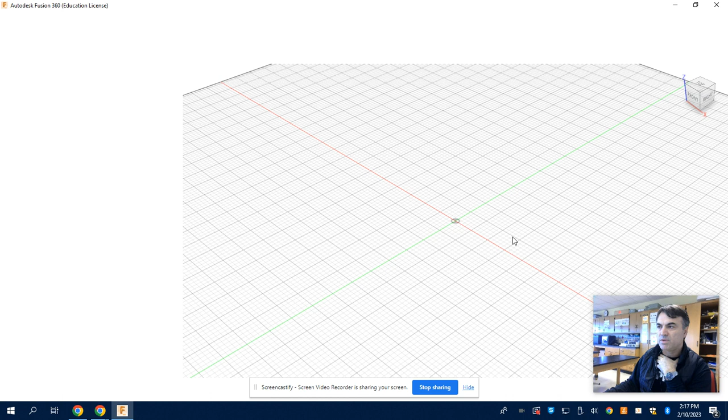So let's go. Again, the purpose of these videos is to get them done in as short a time as possible, so that you can follow up and complete any missing assignment that you might have. All right. So there are a couple of techniques and features that need to be used with Fusion here, but the process is rewarding, I shall say.

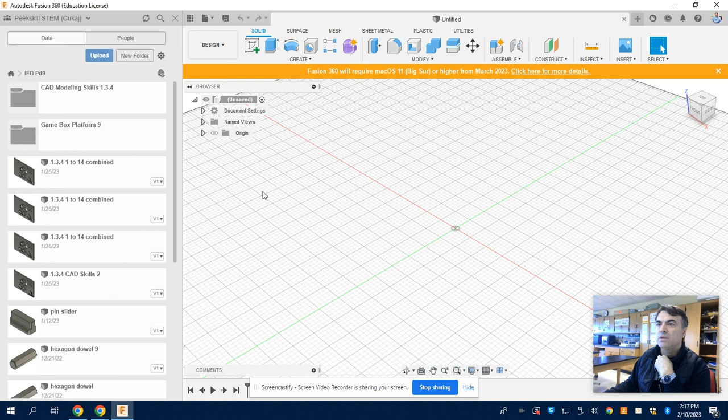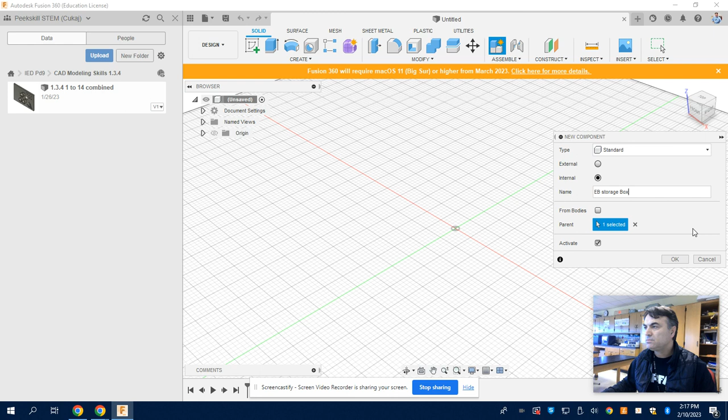Okay, so I'm here. Let me go to period 9, IED period 9 here, CAD modeling skills. Let me right click, new component. I'm going to name this new component earbud storage box. So today I'm going to do only the bottom part of it, the box itself. Alright, so let me get started.

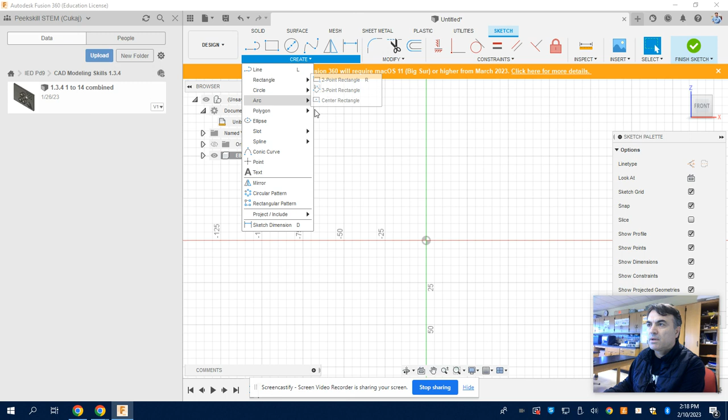Create sketch on the front side. I'm going to create a rectangle, center rectangle. So let me make sure that the units are in millimeters. I'm glad I caught that. Alright, so create rectangle, center rectangle, and put it in the center, and the dimensions for the rectangle are 55 by 32. So 55 tab 32. Alright, so I got that. I say finish sketch. Good.

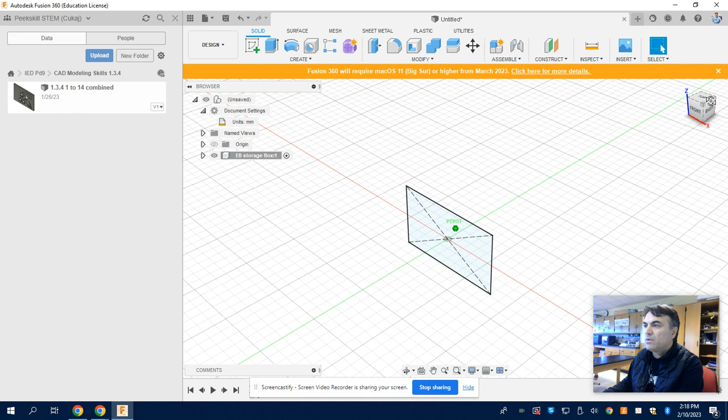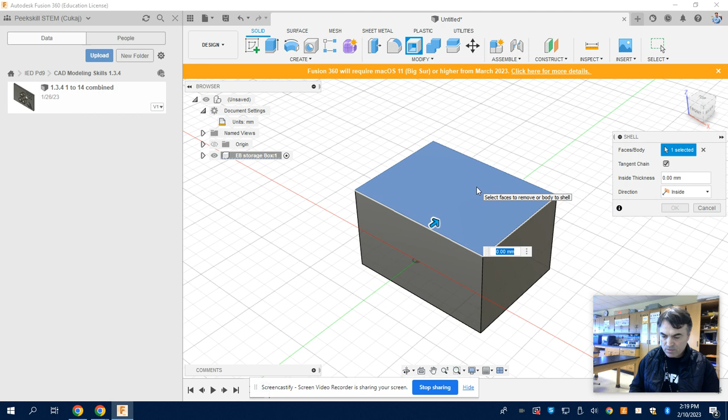So let me bring it a little bit more in view. Now I'm going to go ahead and extrude this. Press extrude, going this way, I'm going to make it 41, that is the dimension for this box. Enter. So now I'm going to shell the top of this box. I go to the shell feature here, click on top. I'm going to leave it 2 millimeters around each side. Press enter. But the back part of it ought to be 3 millimeters.

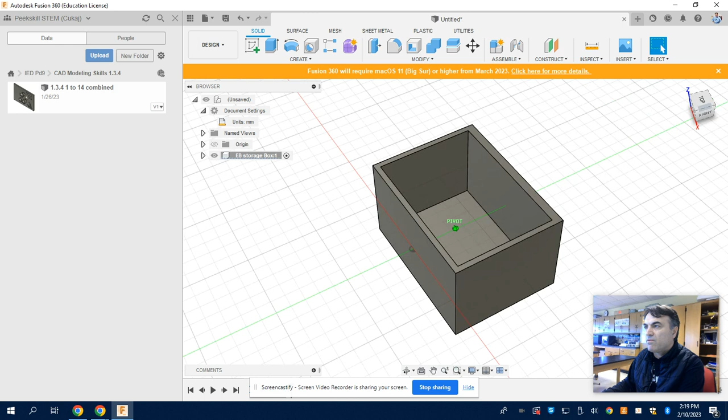So I'm going to click on the back, click extrude, and add 1 millimeter to this back. Okay, so I say enter and everything is fine. If I take a look, you see how this is a little bit thicker than the rest of them. So my next thing here is to add a fillet. I'm going to add the fillet in the front.

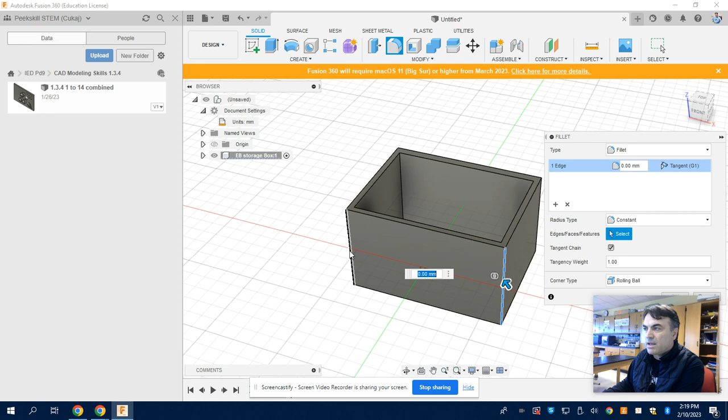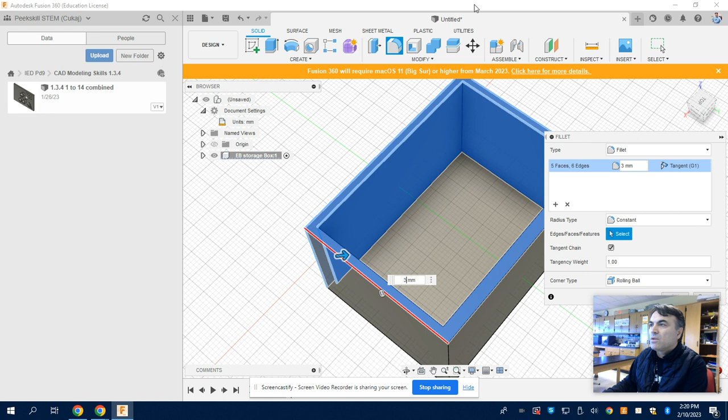So fillet, I'm going to select this, go inside, select this section inside, and select this corner. Nope. All right, so turn this and select this corner as well. So I selected all the front corners, and I'm going to make this fillet 3 millimeters. Press 3 and press enter. Let me see what I got. Did something happen here? Let me move this out of the way. Cancel. Let me go back again.

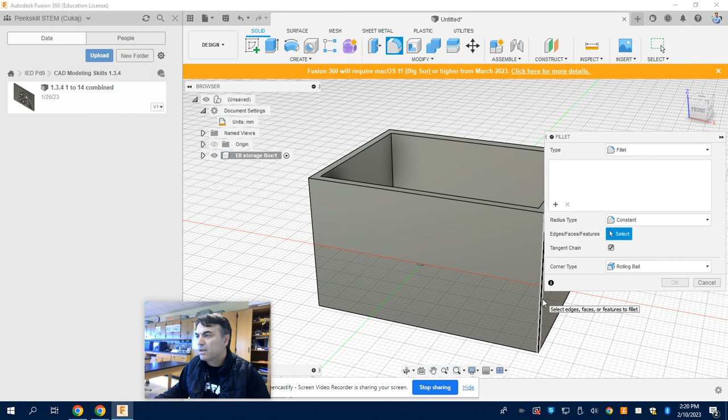So fillet. Again, select this, rotate it, catch this, rotate it a little bit, catch this, and set it to 3. And say okay. So that's done. You see how it took that shape? So this is the front, and so far so good. Alright.

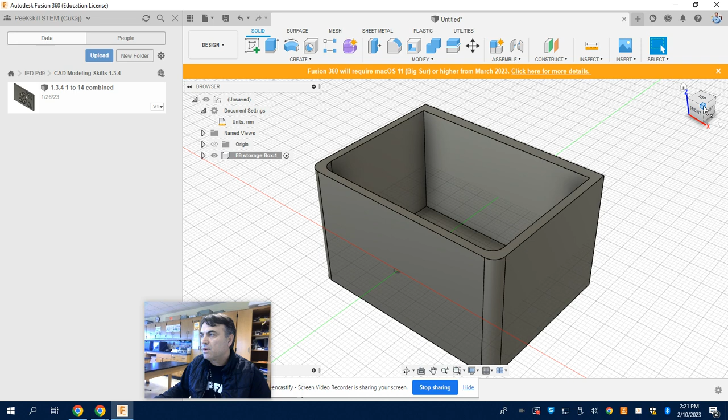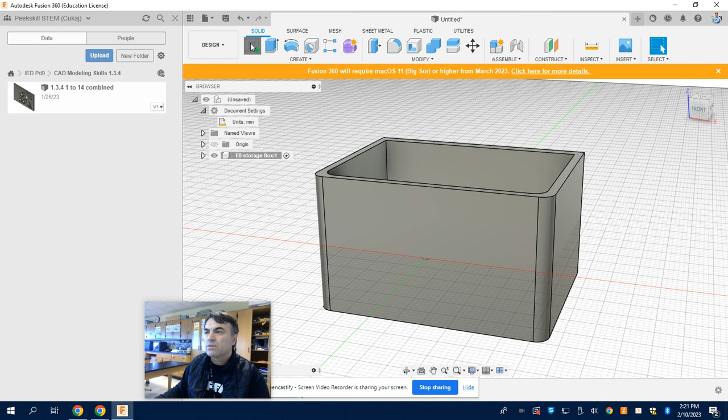Now we are going to add a front rectangle on this side, on the front. So it's this part of the box, you can see it, that section. This is the box that I already built for the other class. So I'm going to create a sketch over here. Create a rectangle, place it over here, and the dimensions for this rectangle ought to be 15 by 3. 15 tab 3.

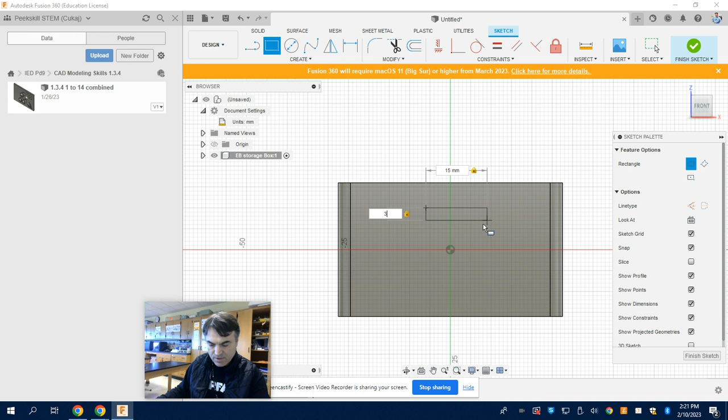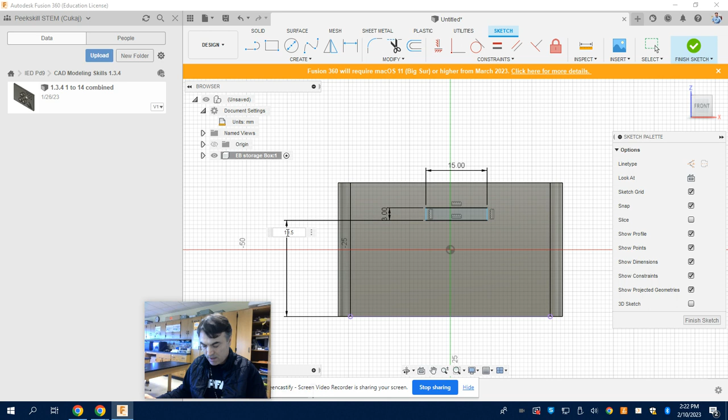And now I have to do some measurements here. Enter. The measurement from the bottom, this line here to this line here, ought to be 19.5. Okay, and that's looking good. Now I have to get this thing over here to this thing over here. Can I dimension? This would not allow me. See how it doesn't turn blue because it's not visible.

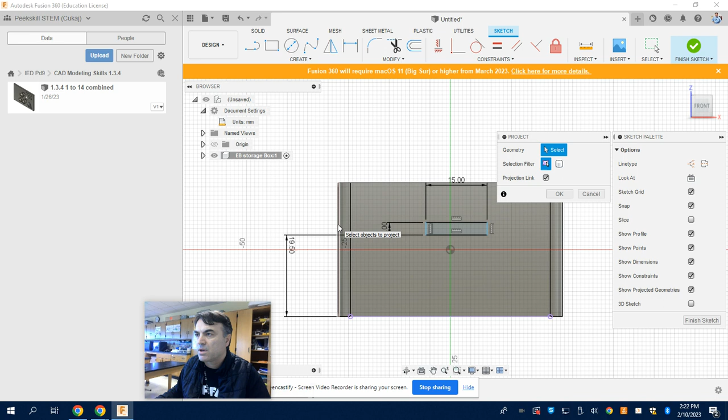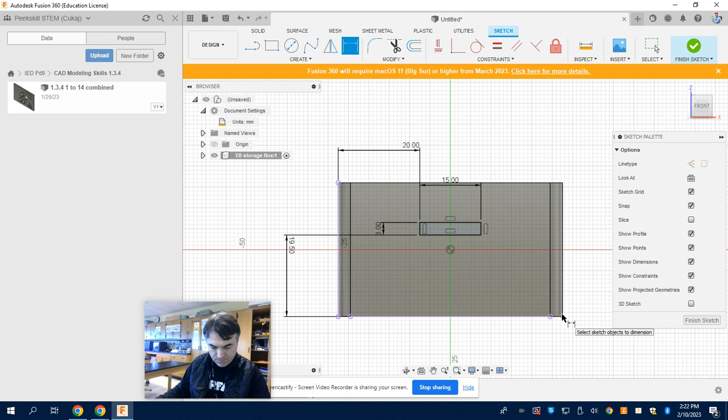So what I have to do is create a projection here. I project this one, and now I do the dimension. So this one to this one ought to be 20 millimeters. Yes. Okay, so we got that. Now I finish this and go ahead and extrude it. I extrude it 1.5, and I press enter.

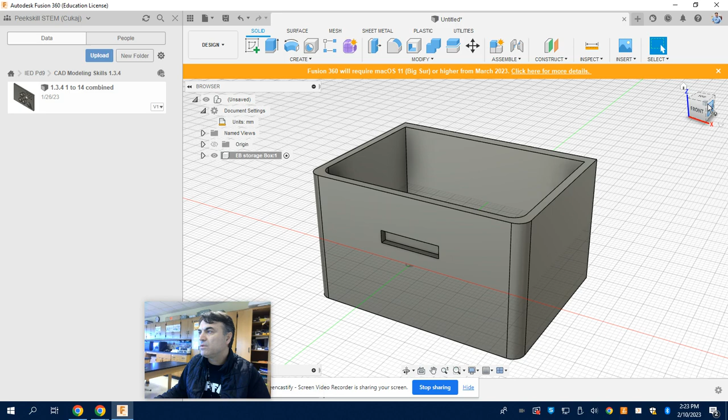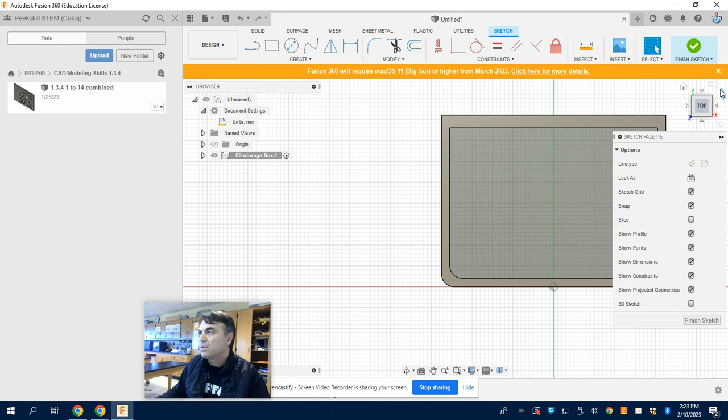You see how I created this? That's the place where the latch will click in to lock the box. Very good. So next, what do I need to do here? Okay, so I have to add some little things. Click here, click create sketch. I have to bring this over here. Okay, it's going as expected.

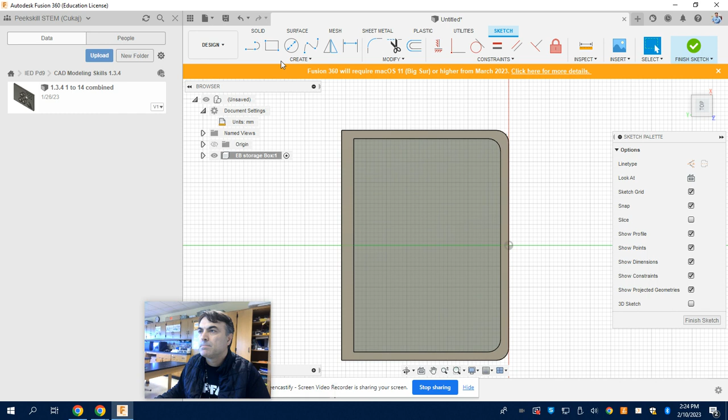Alright, so I have to create a circle that is 2.5 millimeters. So create a circle that is 2.5 millimeters. 2.5. Do I say enter? Yes. Good. Now I have to dimension this: the right edge 15 millimeters and the bottom 17.5.

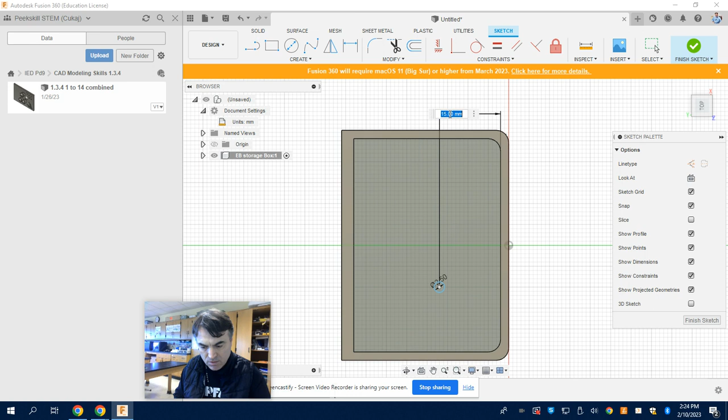So from here, do I need to do that? Yeah, from here to here. So that is how much? That ought to be 15.

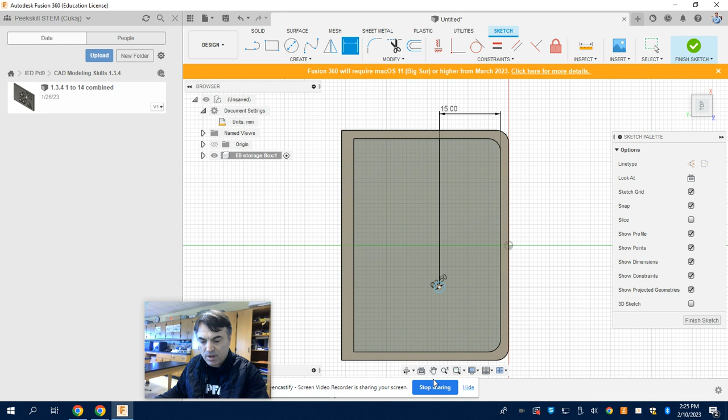Okay, enter. And then what else do I have? From the bottom to the circle, from here to here, I have it 17.5.

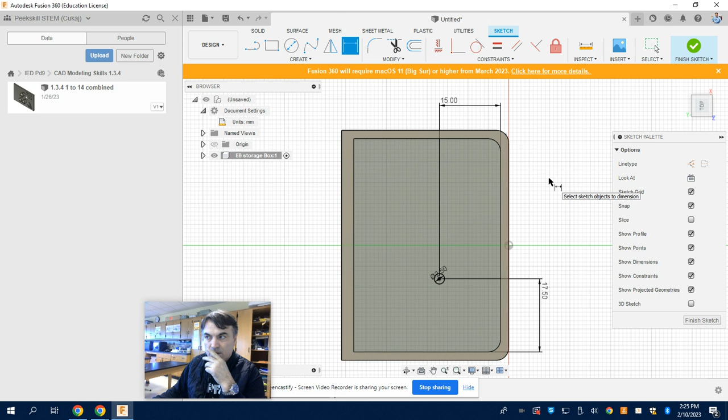Enter. Alright, so we got that. Now I have to use this to create a rectangle pattern. Create rectangular pattern.

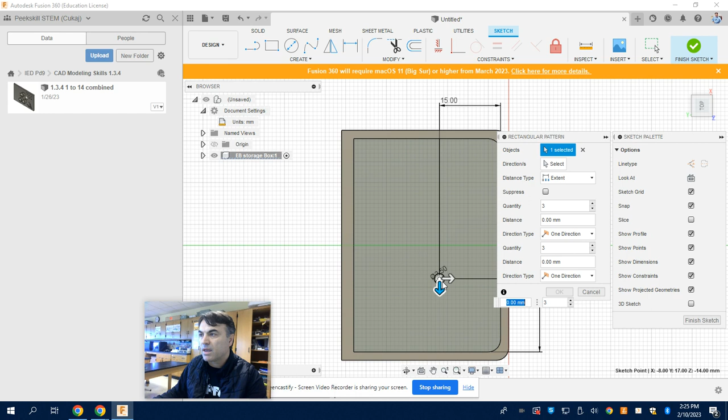I select this, you see how I have some arrows there? So this one to go up is negative 20 and 5, minus 20, and this ought to be 5, tab 5, and then the other one is one ought to be minus 10, 10, and 3. Alright, so I got that.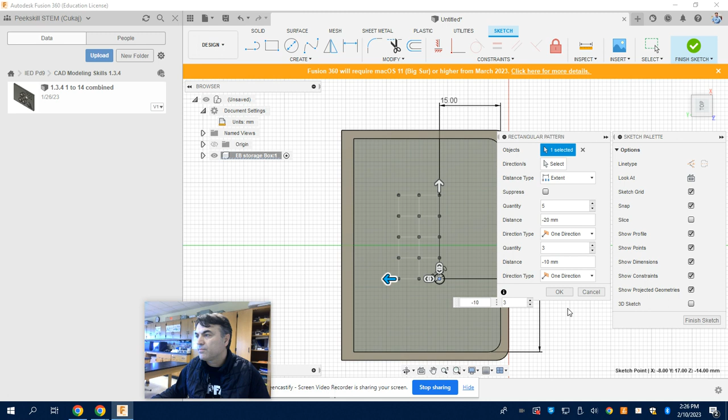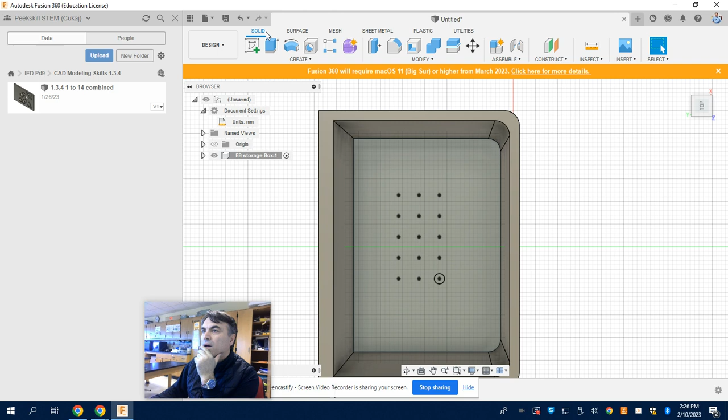I say OK, and I say finish sketch. Very good. So, oh, what happened here? Ah, I know what happened. Alright, go one more time. Select.

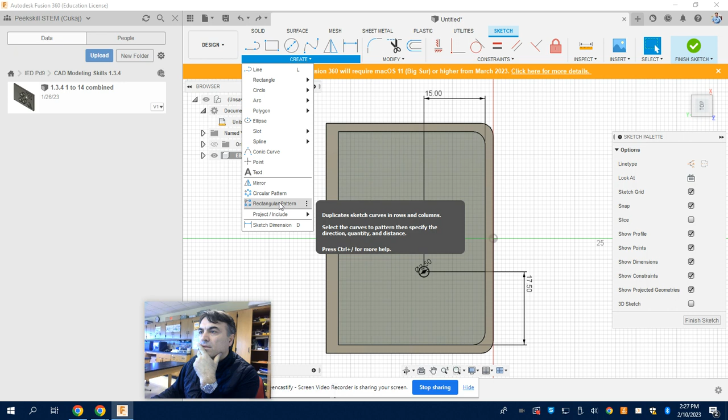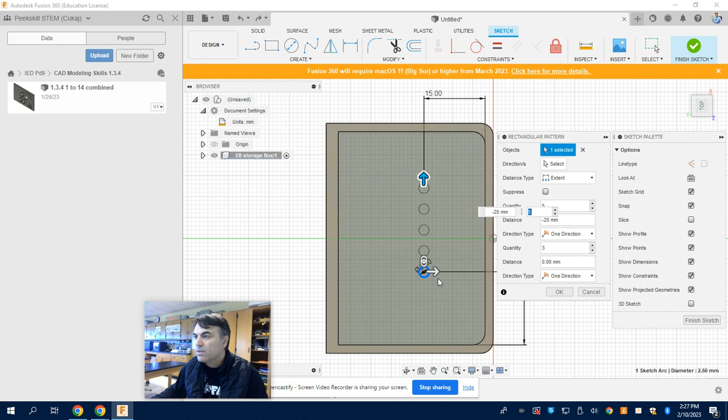Escape, rectangular pattern, create rectangular pattern. I have to, yes, boom, circle. So this guy has to be negative 20. This one has to be minus 10 and 3. Now we are talking.

Okay, now I create the circles and I say finish sketch. Now I have to extrude them. I select all of them. Alright.

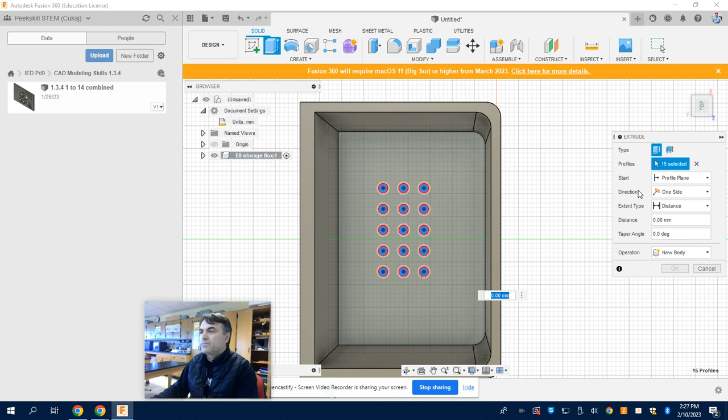And I have to make an opening and make them minus 2 or 2 depending on the direction of the arrow here. So you see how it's coming up, so I have to do it negative 2 because I want it to cut down. Minus 2 millimeters over here, minus 2, and I press OK. So I got the holes here, and that looks good.

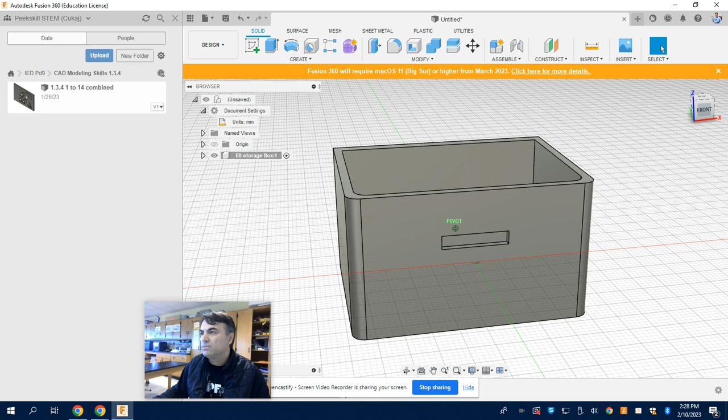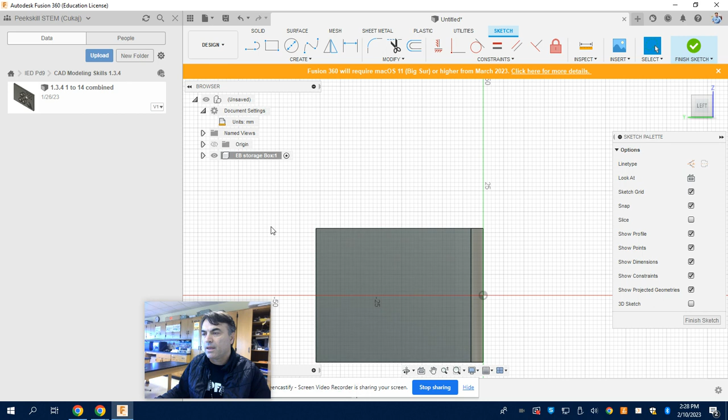Alright, so now I have to add a circular pattern, and I'm going to add it here. So I select this section over here, and I create a sketch, and I create a circle. This circle ought to go over here somewhere, and it has to be 5 millimeter in diameter. I have to press enter.

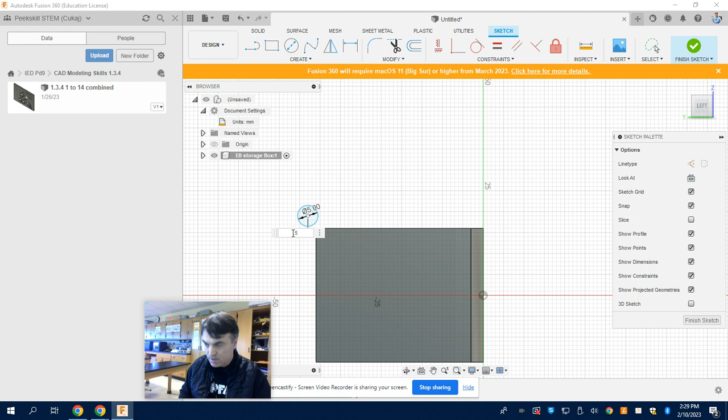Alright, so now I have to do some dimensioning here, and from here to here, it has to be minus 0.5. Enter. And from here, dimension again, from here to here, minus 5, or 0.5, I shall say.

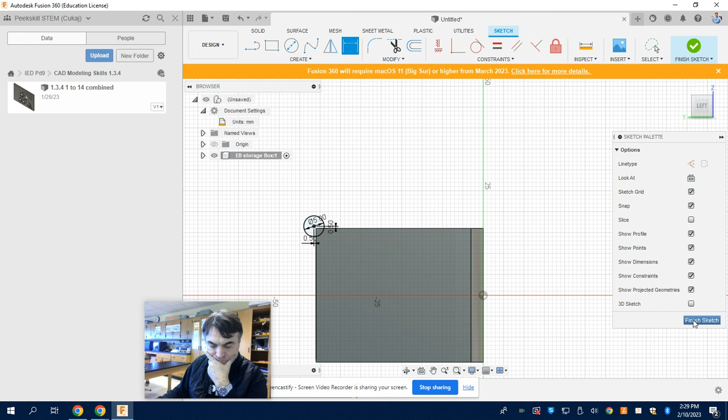Alright, so do I have to do it to the circle or to the center? Let me say OK to this. Finish sketch. Okay, let me undo this.

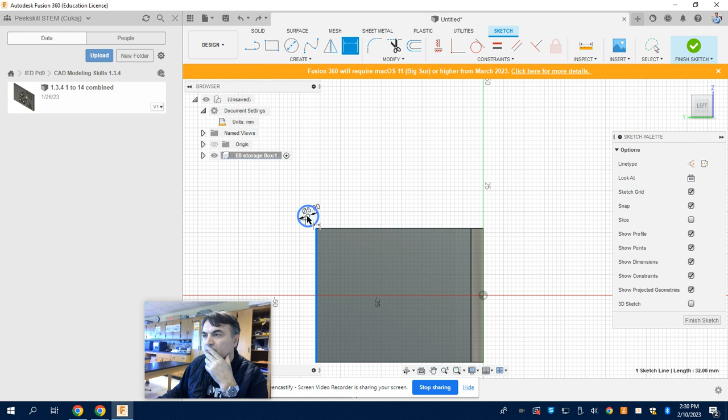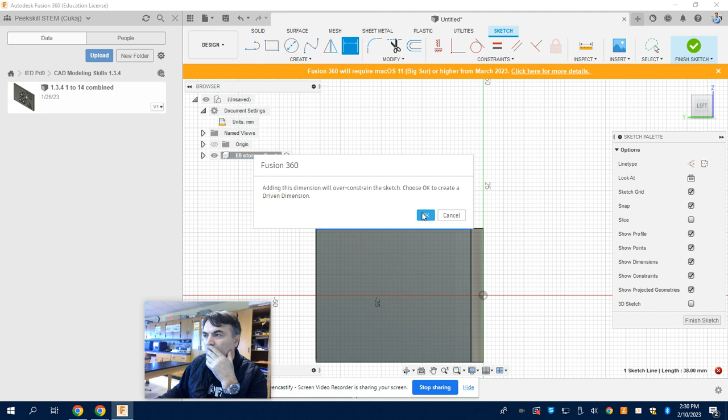So because the dimensioning has to be from here to the middle of the circle. Okay, 5.5. Enter. And then from here to the center, again, okay, that has to be 0.5 too.

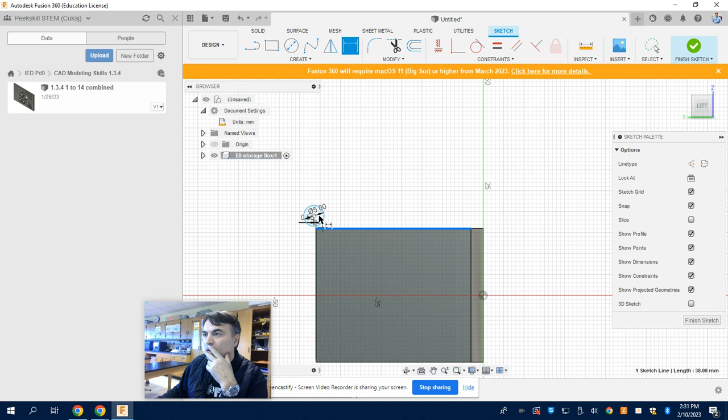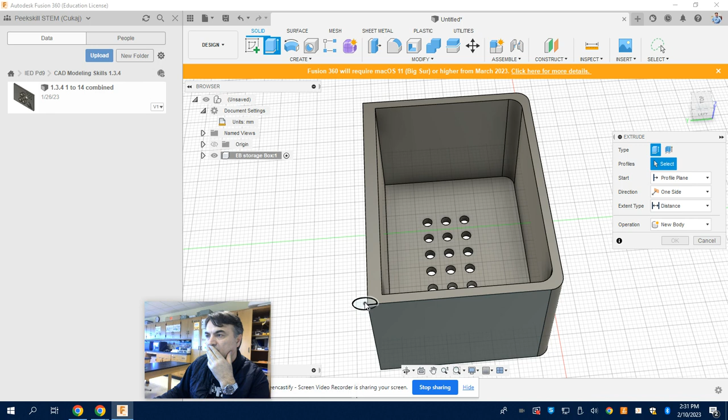Alright, let's see what we got there. So I got, and I say finish sketch. Now we have two. Oh, okay. I think, let me see if it's how it's going to go. I have to extrude this from here the other way minus 10. Enter. All right. So I did that.

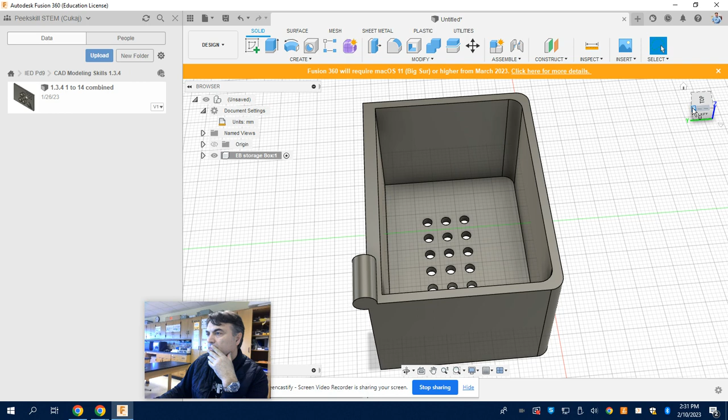Now I have to go on the back, click here, and I have to create a sketch, and that sketch, a rectangle from here to here, and I have to add some dimension here.

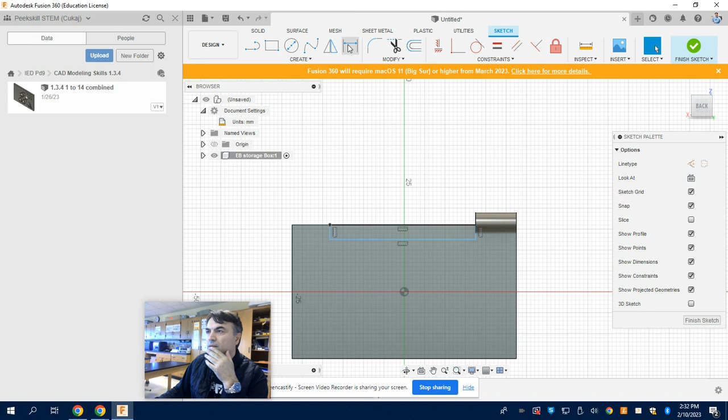D for dimension. From here to here, I want it to be 10. Enter. Okay? And from here to here again, 10 as well. From here, ten. Okay, that is good now. So I say finish sketch.

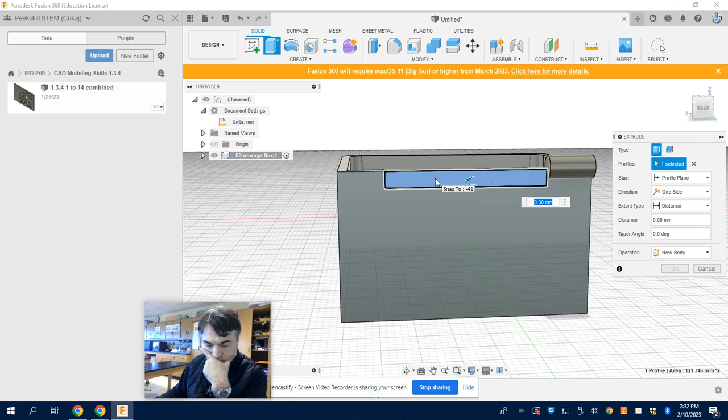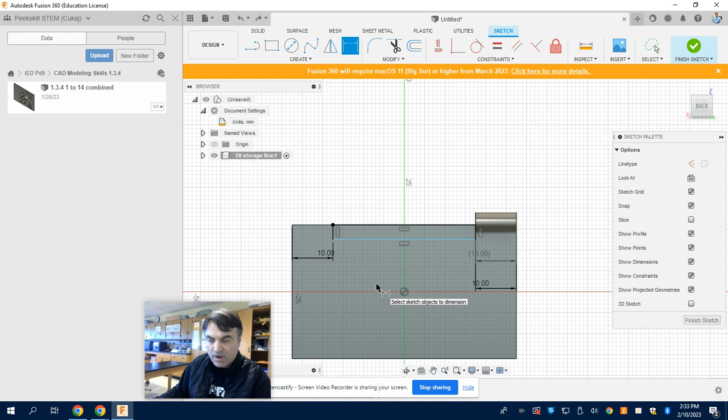Alright, now I go to extrude. I extrude this section. Did I give it back? Back. Alright, so I have to do some further, because this to be, come on, I got 2.5. So from here to here, to be 2.5. And enter. Alright, so now I can finish the sketch.

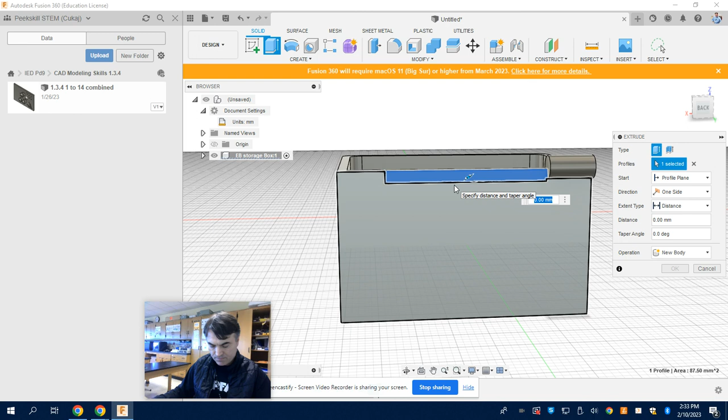Now I go to extrude. I click on this. 3 millimeter. So 3. Enter. Did I do it correctly? Yes. Perfect. Oh no, -3.

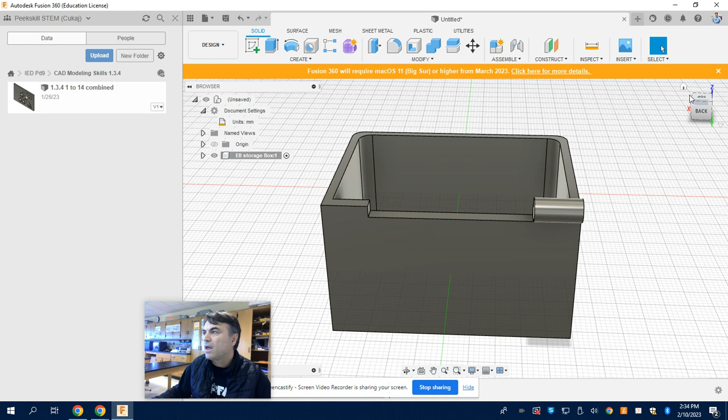So back, extrude this section -3. Enter. Yes, now we are good. Now this is perfect. Alright, so I got that.

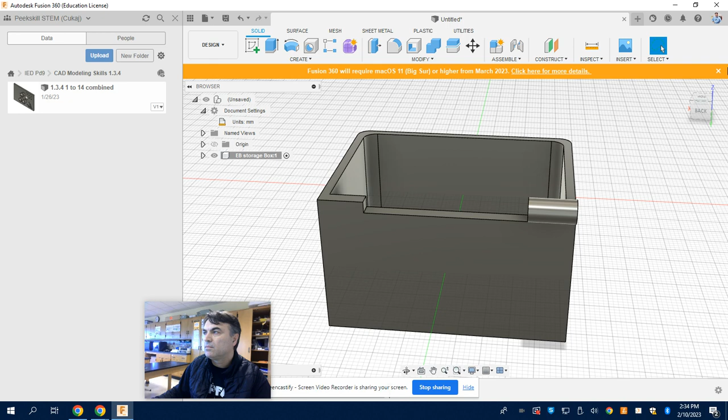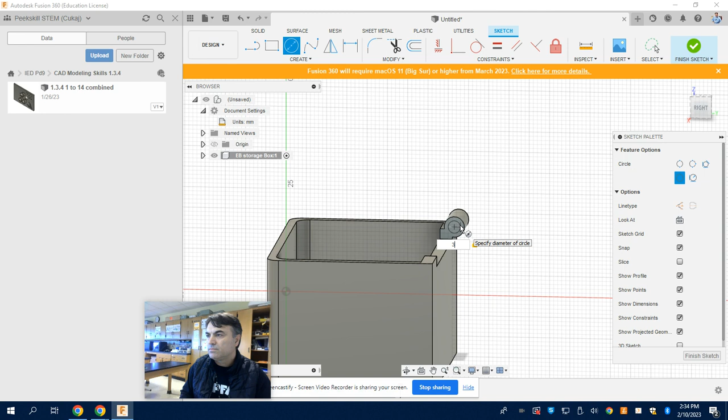Now we have to create a sketch. Create sketch on this guy over here. And then there I have to create a rectangle, a circle of, how much does it have to be? 3? 3. Enter. Now I have to finish that.

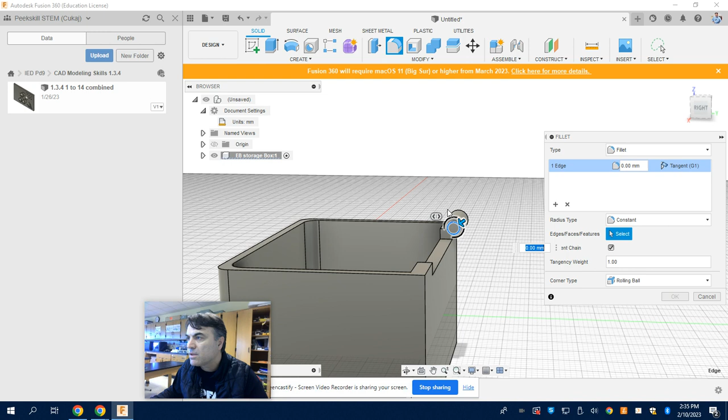I have to extrude and this section 1.5. I press enter. Hopefully, yes, it did come this way. I have to fillet this circle again 1.5. Enter. And it took the shape that I wanted it to take. So now I have to do the next one.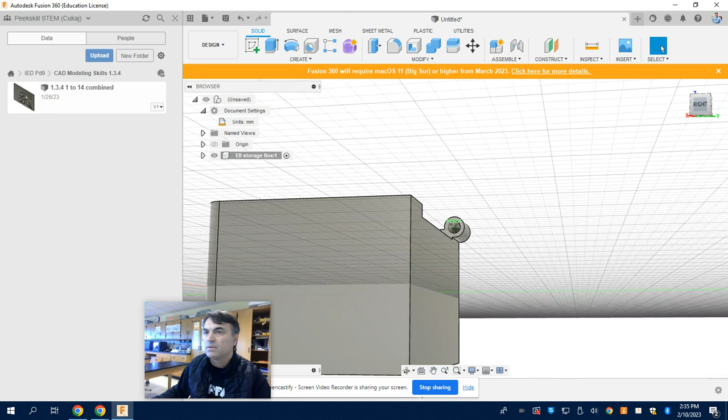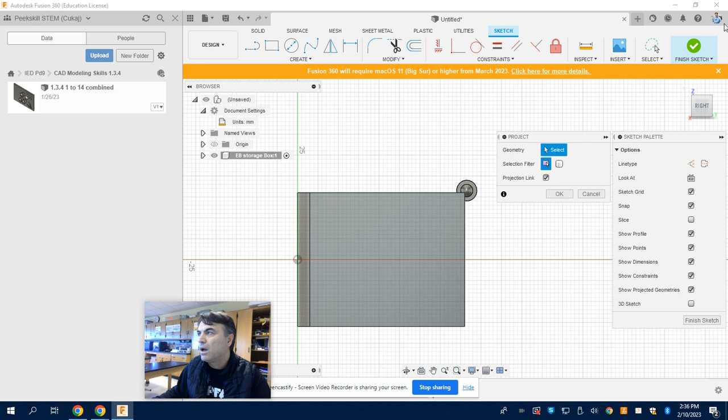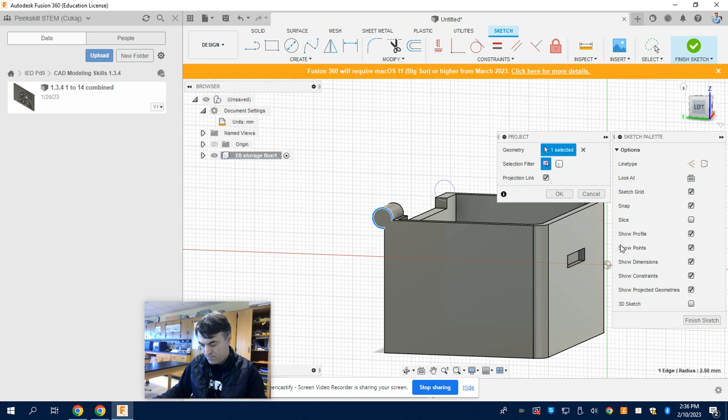So I turn it around, I click here, I say create sketch. Alright, so I say create, project. I'm going to project original circle. This one. Boom. I say enter, and I say finish.

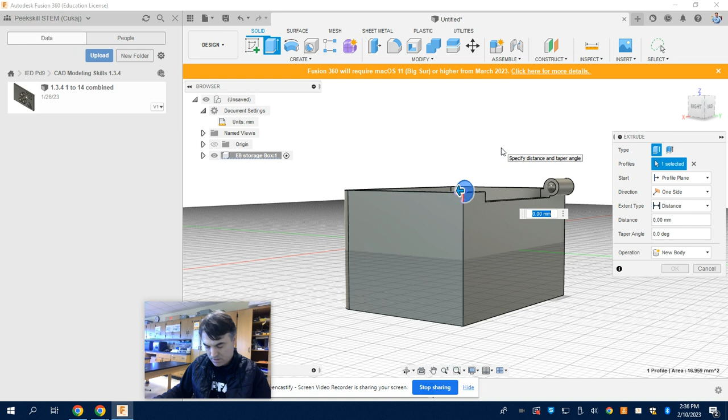I turn it around, and what I do next, extrude over here, -10. Alright, and I say OK. Perfect.

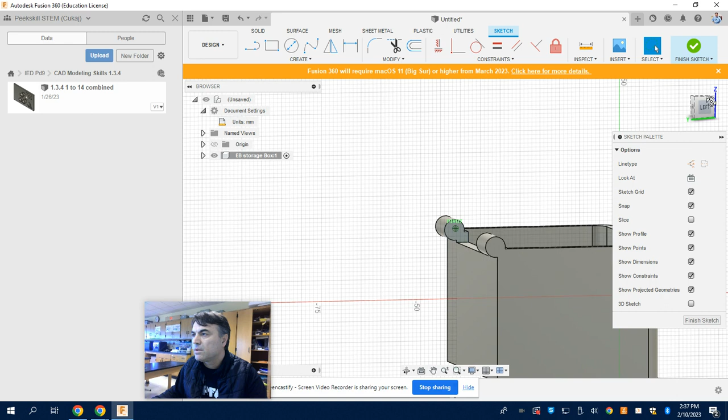I flip around and create sketch right over here. Alright, so I want to create the same thing. Alright, create. Should I do it through project? Yes. Go back.

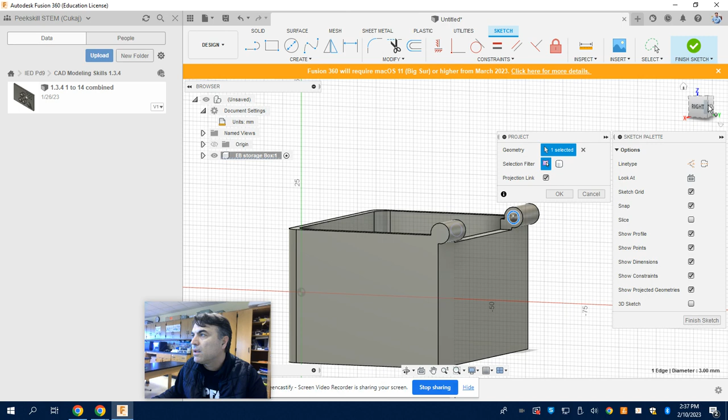Go around. I want to project this guy. Alright, so over there. And I say, OK. Enter. And finish sketch. And then I extrude this guy

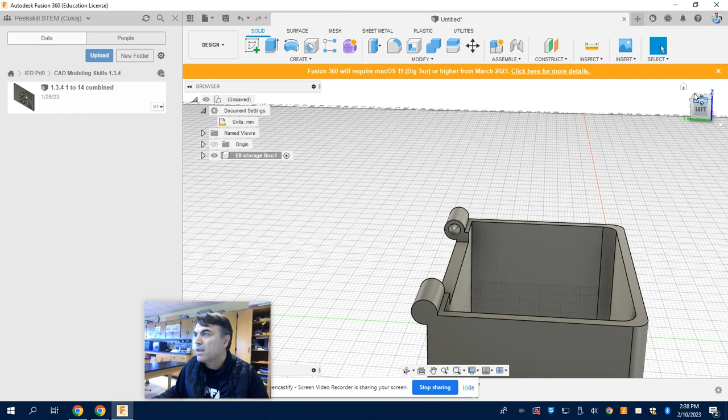1.5. I say enter. And then I select this guy 1.5. And I say enter. And believe it or not, I am done with the box.

Alright, so the bottom part is going to look like this. So all we are left is the top part, which we'll do it tomorrow or Monday.